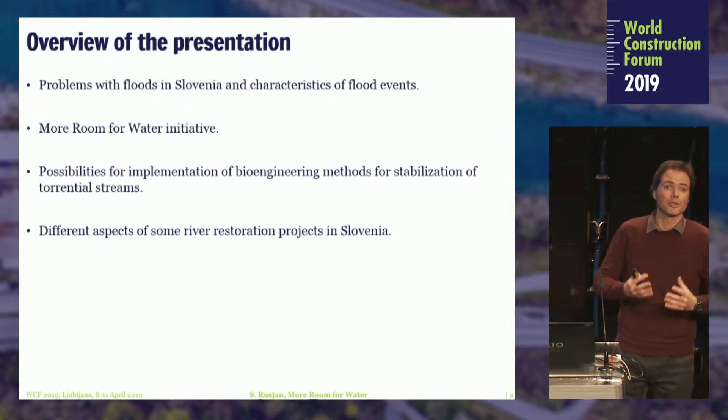Just a quick overview of the presentation. The main talk will be about problems with floods and damage from floods, but this is just a small part of the whole water management issue that the More Room for Water initiative is trying to tackle. So we will briefly look into some main problems that we are dealing with regarding floods in Slovenia. Then we will look in a little more detail into this More Room for Water initiative.

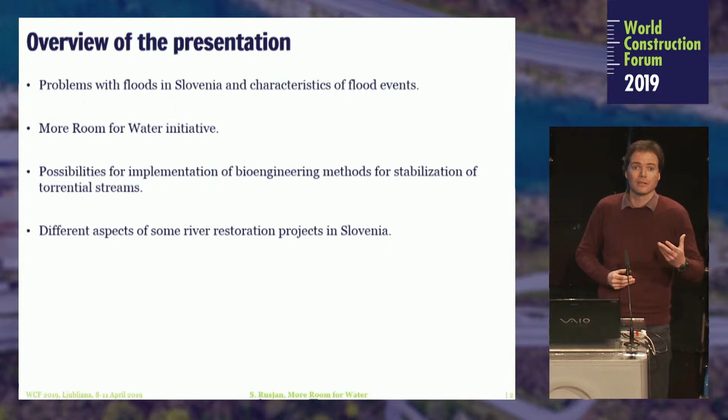We will look into some possibilities to implement these ideas of the More Room for Water initiative into engineering practices, or some innovative attempts to manage or improve river engineering methods. And at the end, we will look into some attempts to restore sections of streams in Slovenia, and what the final results of these attempts are.

So just maybe a few numbers about the damage in Slovenia. They are taken from official data by the Ministry of Environment and Spatial Planning. In the last 25 years, we have approximately 2 billion euros of damage due to floods. An estimation is that annually, in the last 10 years, we have had about 150 million euros per year altogether in damages related to floods.

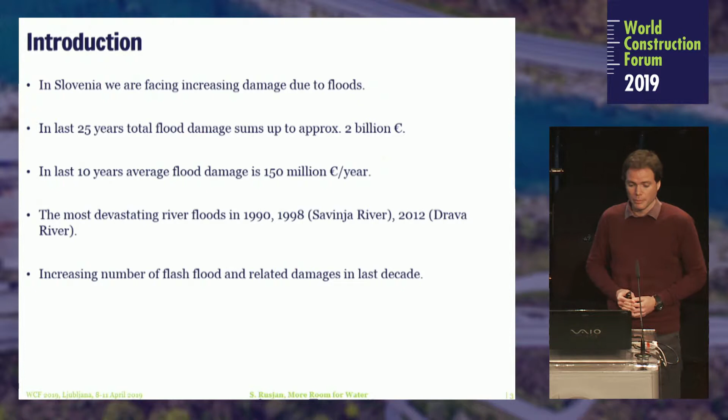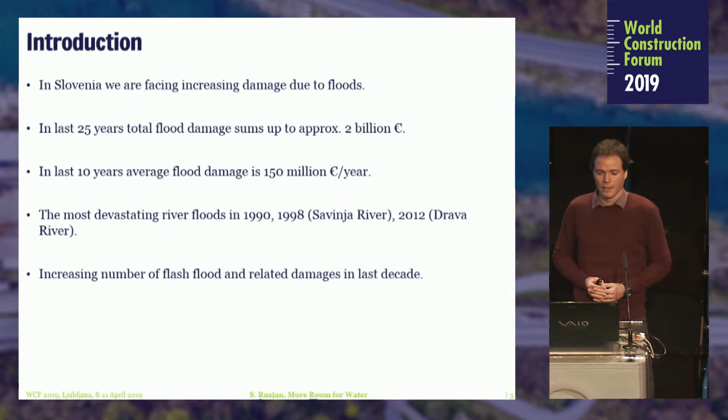We had quite a few devastating flood events in Slovenia. Some of them were already presented before. And the fact is that we are noting an increased number of flash floods in Slovenia, and also the related damages from these floods.

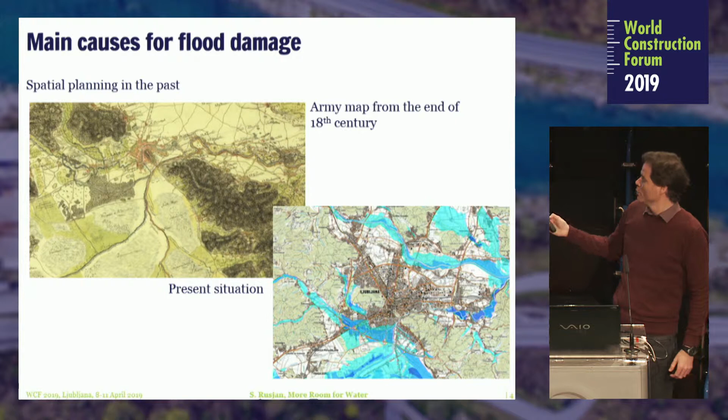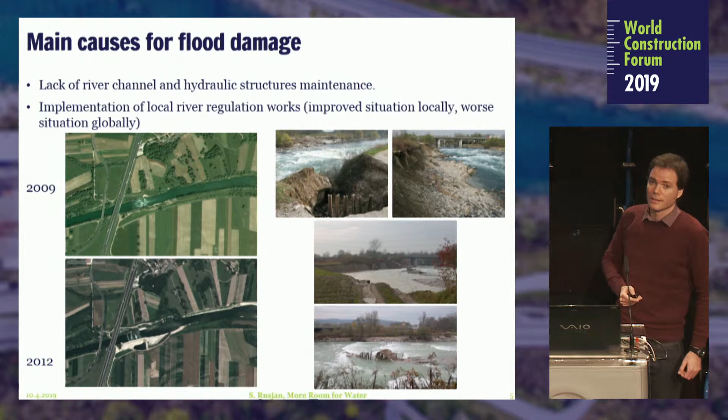What could be a little more specific for Slovenia is that we know we have a lot of problems with maintenance of the water infrastructure. Here we have some figures about one flood event and the situation with the river infrastructure, the river embankments. For example, in 2009, we can see some small damages of the river embankments, the river levees. Then after the flood event, you can see from the pictures below how the whole section of the river was completely eroded, and a lot of resources were invested to stabilize this section in the following few years.

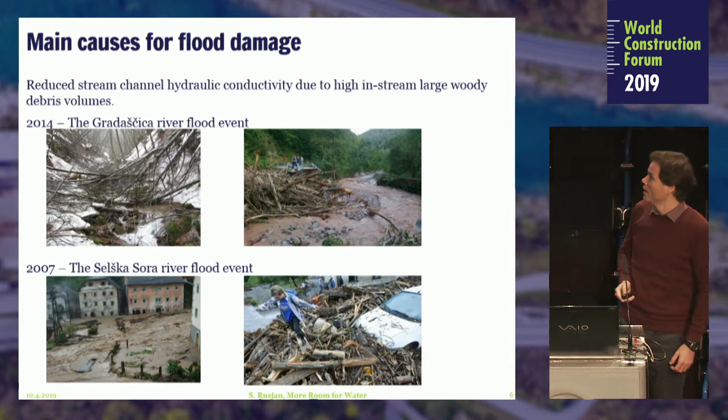So what is the idea behind the More Room for Water initiative? Like I mentioned, a little more stress will be on floods and flood damage, but the idea is not just reduction of flood damage and tackling floods. The main aim of the initiative is to gather a knowledge database that will enable scientific assessment and promotion of integrated and holistic sustainable water management and also space management.

We are currently trying to analyze the current state of water management in Slovenia and in different European countries, and we try to pose some future directions for the development of river management, especially by identifying good and bad practices, as we could see today through some other presentations. So basically, More Room for Water is not directed only at floods, but means much more—we are trying to cover a very wide range of water management and river engineering issues.

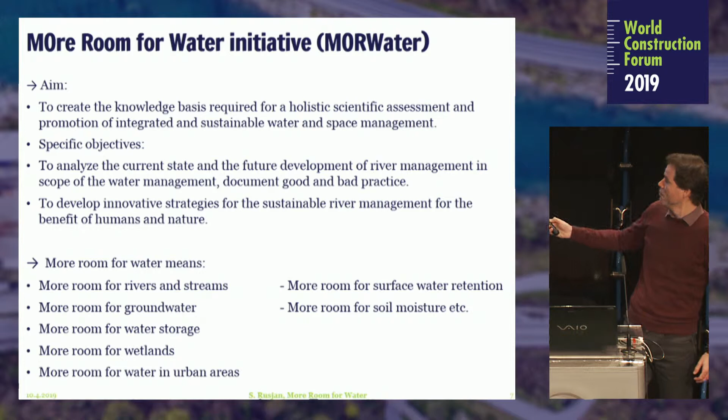Basically, if we think more in this idea of More Room for Water, we have assured more room for water inside this dry detention area by implementing this measure.

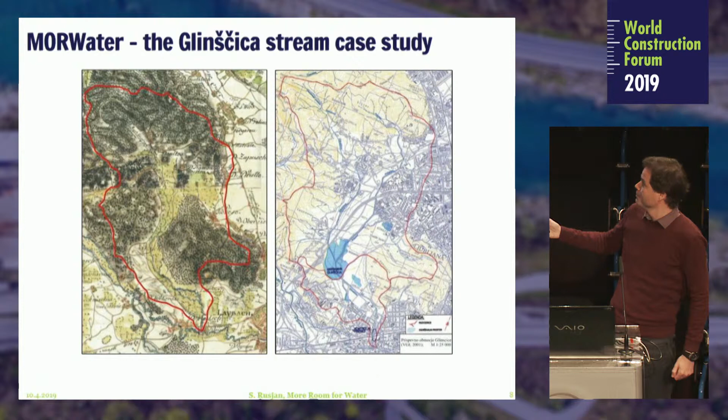Another thing worth noting in this initiative is the use of bioengineering methods for stabilization of stream channels, which is widely promoted, but together with the implementation of these methods we also have a lot of problems that I will talk about later.

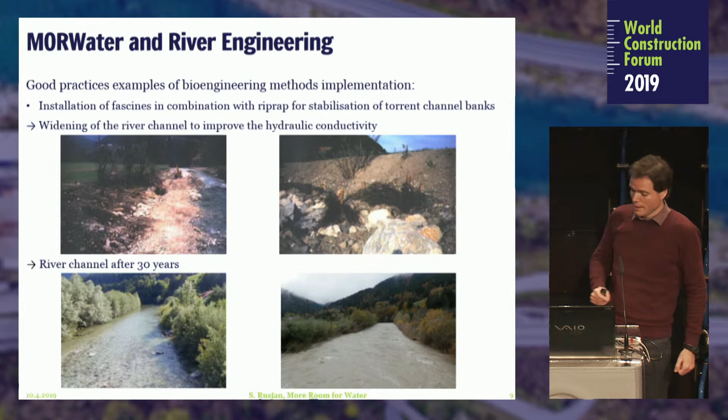We are mostly talking about floods, but there is also the other extreme, low flows, which are also very problematic in terms of ecological and chemical state of streams. I have a few examples of how the ecological state of a stream was improved by, in principle, very simple engineering methods.

There were some stone weirs installed in a stream nearby Ljubljana, in this urbanized area. By installing these weirs, we achieved a huge increase in the water volume during low flows - the water volume almost more than doubled. This influenced, for example, the population of fish, which was completely devastated during the regulation of this stream.

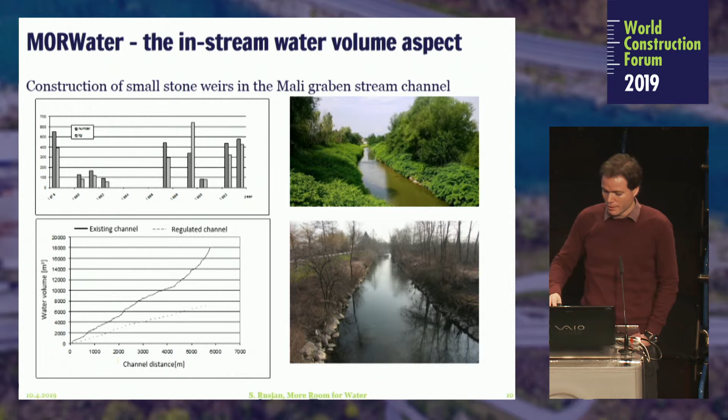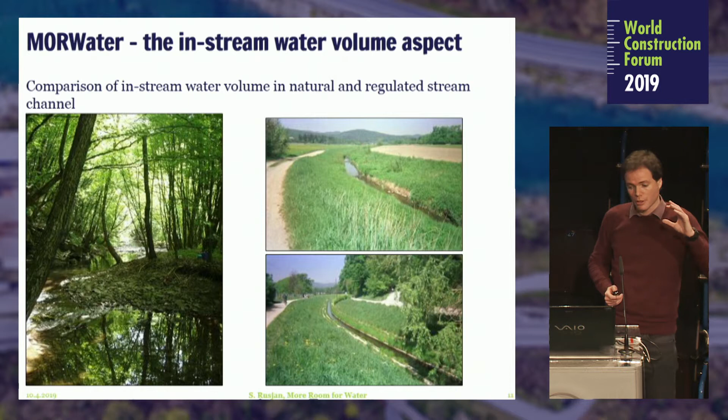Another interesting thing can be seen from these three pictures. On the left side we have a natural channel where you can see a lot of hydromorphological elements - pools, riffles, very variable water velocities. On the right you can see one channelized channel in Ljubljana. The interesting thing is that discharge in both streams is the same, but the water volume in the natural stream is much higher. So in assuring more room for water, we can do that also for low flows, not just thinking about extreme or flood events.

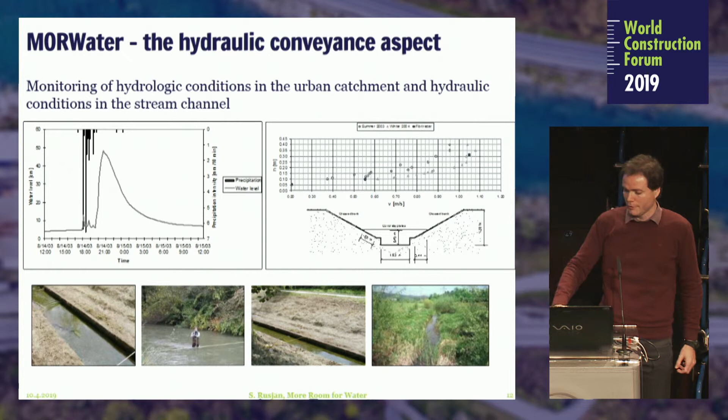Another thing I would like to point out is the aspect of hydraulic conveyance. We have done a lot of experimental measurements, as shown by my predecessor, in several experimental catchments in Slovenia. For example, here are some measurements inside an urbanized, heavily regulated, devastated channel paved in concrete. But even though the channel is paved, during measurement we observed quite different hydraulic conditions in different seasons. In summer, water velocities were approximately 30% lower than in winter. So even though the material is basically artificial, there are nevertheless some differences in the velocity field in this channel.

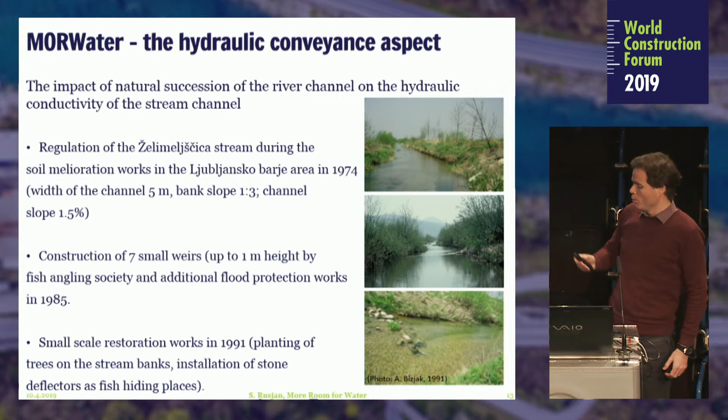Another example of river restoration experiment in Slovenia is a small stream, Želimeljščica, also positioned near Ljubljana. This stream was in the past regulated to enable agricultural production nearby. Following these regulations, the Fish Angling Society decided that as a result of this river regulation, the river channel as a habitat was pretty much devastated. So they installed some small weirs in the stream channel, replanted some of the riparian vegetation, and tried to improve conditions for the fish and for the overall water habitat.

But the interesting result is that after 30 years of no intervention from man, the river took its natural succession, and we can see that this channel became completely overgrown by riparian vegetation. In hydraulic terms this is very problematic, for example in view of floods, because the hydraulic conductivity of this existing channel, as you can see here, completely overgrown by vegetation, has considerably decreased by more than 75%. Only one quarter of the discharge can now be conveyed at bankfull discharge compared to the channel constructed in the 70s.

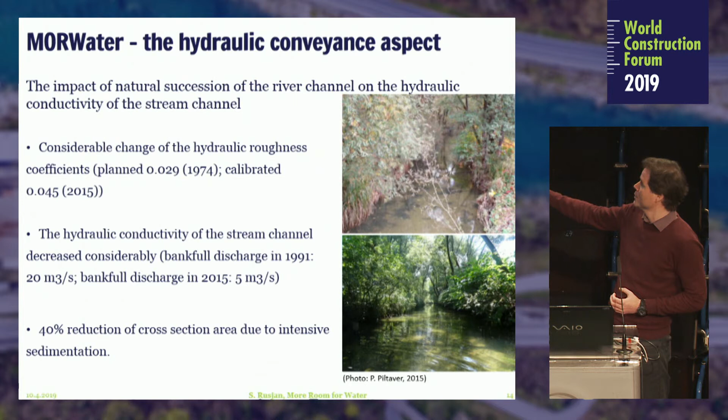And related to these vegetation processes, intensive sedimentation processes also occurred in this reach. All this together poses a huge problem for future flood hazard situation in this area. So to draw some conclusions: the main result of past river management is that we took some space, or some room, that once belonged to the water. This is one of the main results of past river regulations, and it also influenced sediment transport and hydraulic conditions in these regulated river sections.

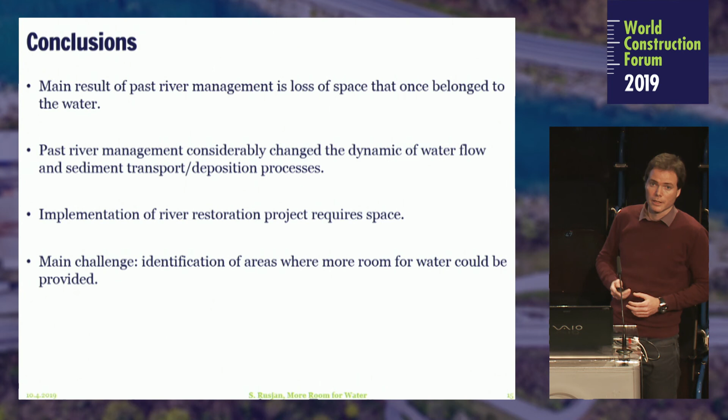The one thing that stimulated us, in scope of the UNESCO chair, to think about assuring more room for water is the fact that when we talk about river restoration or rehabilitation projects, we cannot think about them without thinking how to assure additional space where the project could be implemented. So one of the main challenges we see is related to identifying areas where this room could be provided, for example for safely diverting flood waters and improving the flood hazard and flood risk situation in urbanized or other areas. This is also related to the statement we contributed to the Ljubljana Declaration.